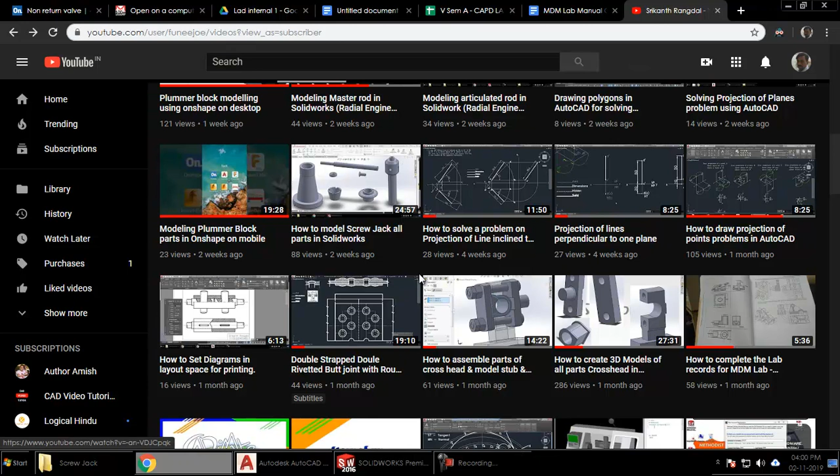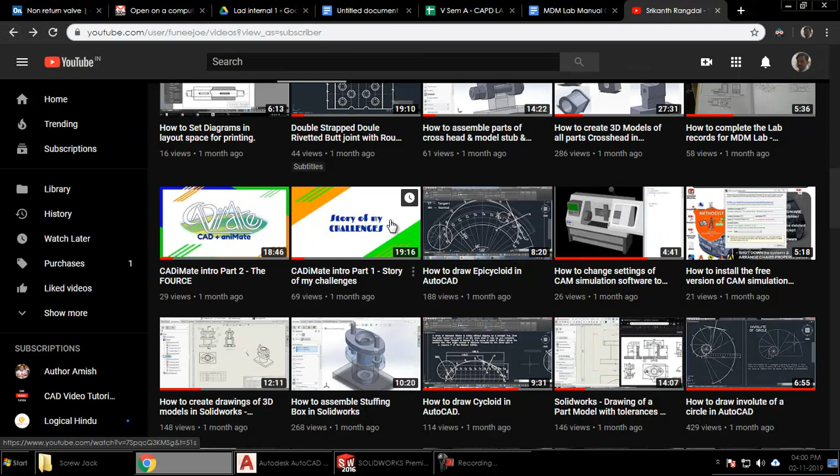In the previous video, we had seen how to model all the parts of the screw jack. This is the video here, you can see this. And I had forgotten how to assemble them. So in this video, we'll be assembling all those parts that we had created in our previous video.

So in order to assemble them, you'll have to go for a new file, click on assembly, click open, and press escape. First, let us save it. Just save it to the same place. So screw jack assembly, I'll just name it assembly, and then I'll have to insert the components one by one. So while inserting, you just have to click on browse, and you have to browse to each and every part that you want to insert.

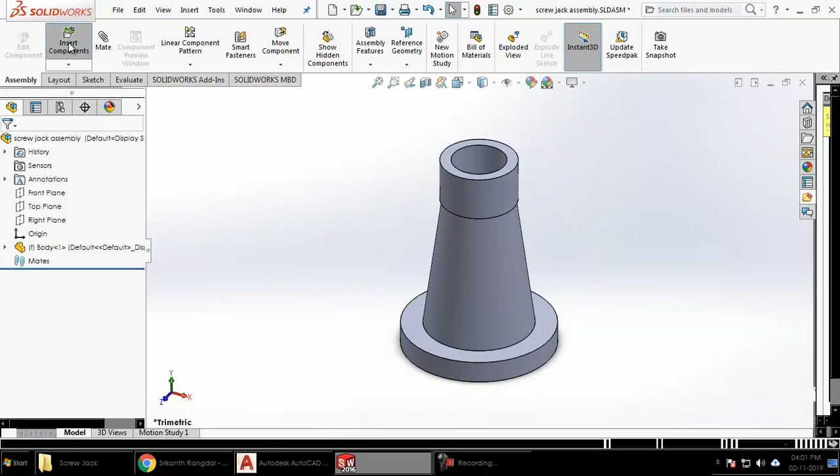So first, let me go for body. Body part will be placed, and you can see the first part that I insert will get fixed automatically. Go for insert again, browse, and we can go for all of the parts one by one, or you can just press Ctrl and select all these parts at once. So click open, and all these parts you'll be able to insert them one by one.

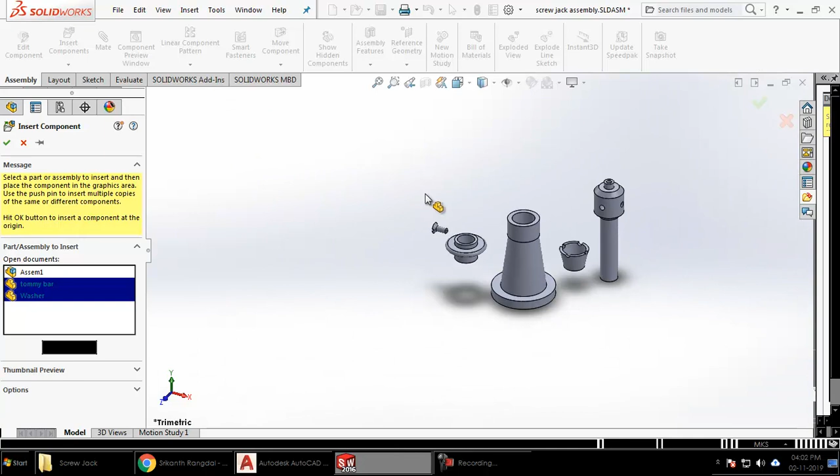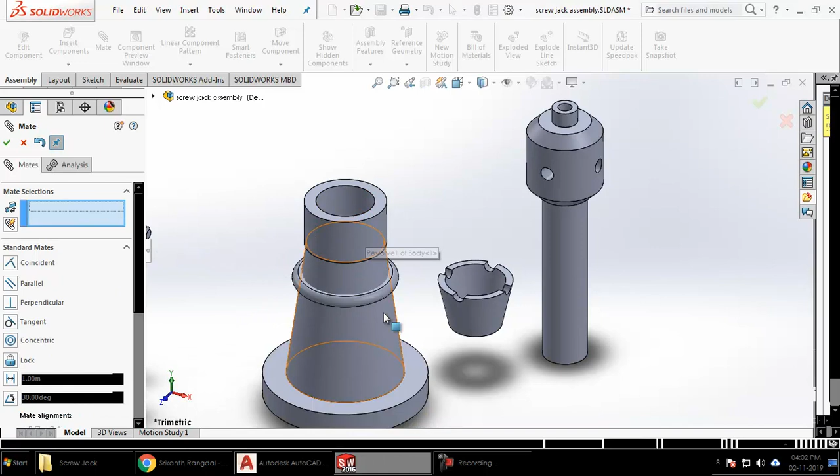Fine. So having inserted all those parts together, the body is already fixed, so you can directly start mating these parts. The first part that you have to mate is this one with this. So it will become a revolute joint. You can just raise and make it like this. Next, what we want to do is we want this face to be in contact with this one. So that has got mated.

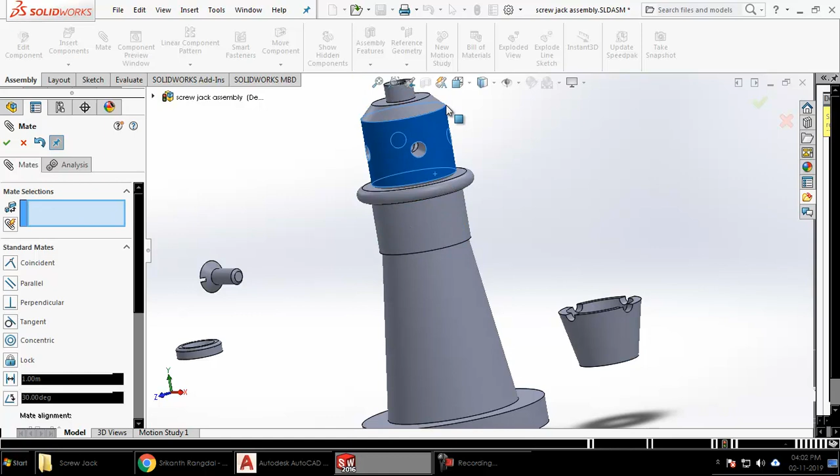Click OK. Next, this cylindrical surface with this cylindrical surface, we can raise and make it fall. So this needs to keep rotating and moving down and up the same way. Next, we will have to take up this one with this one. So once again, it has become concentric. The axes have got coincided. You'll have to raise this part up, just like this.

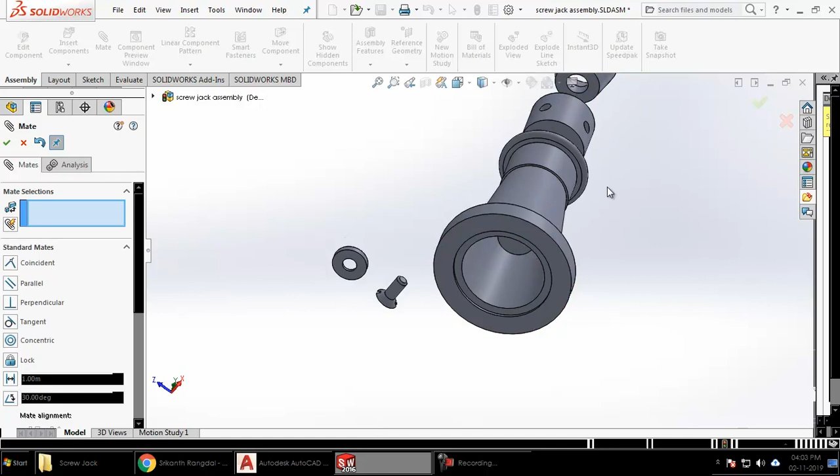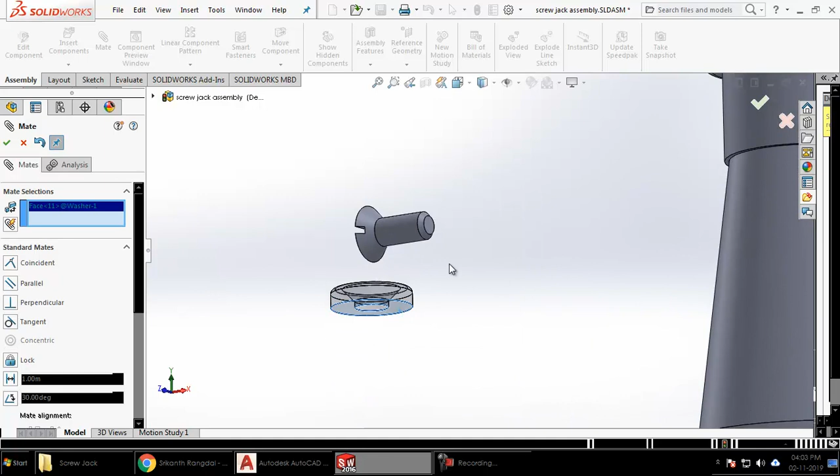Next, what I'll do is I'll just take this face, and make it coincide with this face. Click OK. Next, I'll have to take this washer. So let me take this plane and make it coincide with this plane here. Fine. So that will bring them both to the same level, and it will be moving in the same plane.

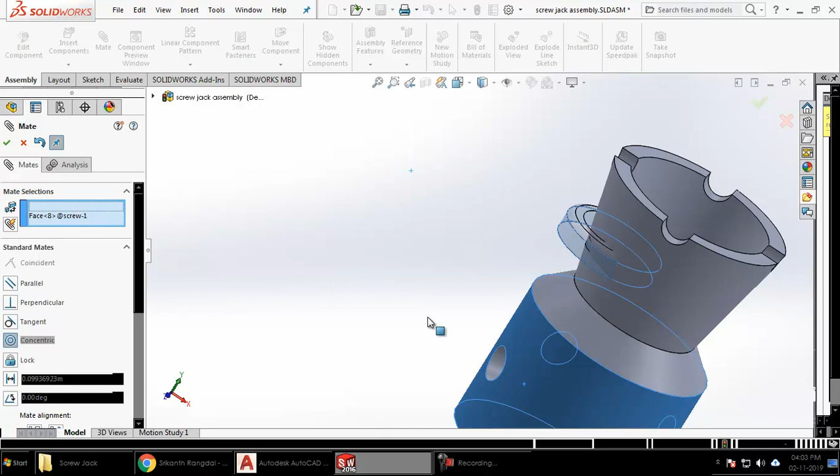Next, I'll have to coincide their axis. So I can just select this cylindrical surface, and along with that, any cylindrical surface you can just click on. So that will make sure the axes of the two cylindrical surfaces selected will coincide. Finally, I'll have to assemble this. So axis of this cylindrical surface with the axis of this cylindrical surface. It has gone inside. Click OK.

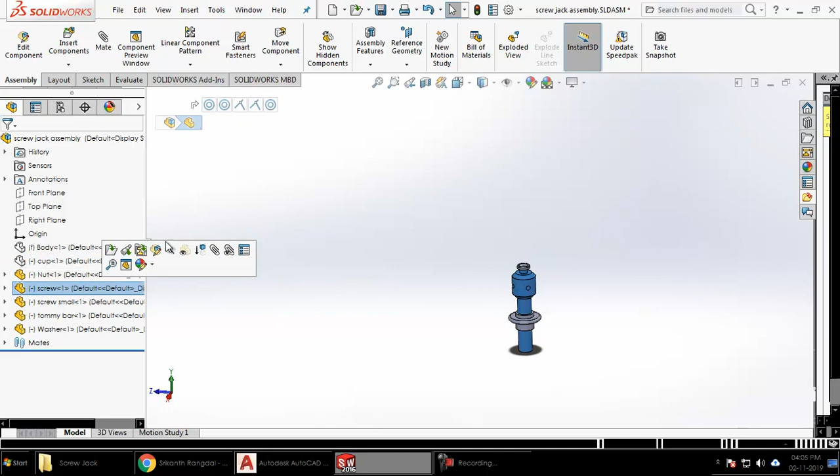Fine. Bringing it up is going to be difficult. So what you'll have to do is you'll have to hide some of the parts. Body, I can hide it. In order to hide, you just have to click on this part in the navigation and click on this eye. It will hide. So go on hiding whatever parts you don't want. And yes, at some point you'll be able to see this part like this. Then I can just unhide it by clicking it once again.

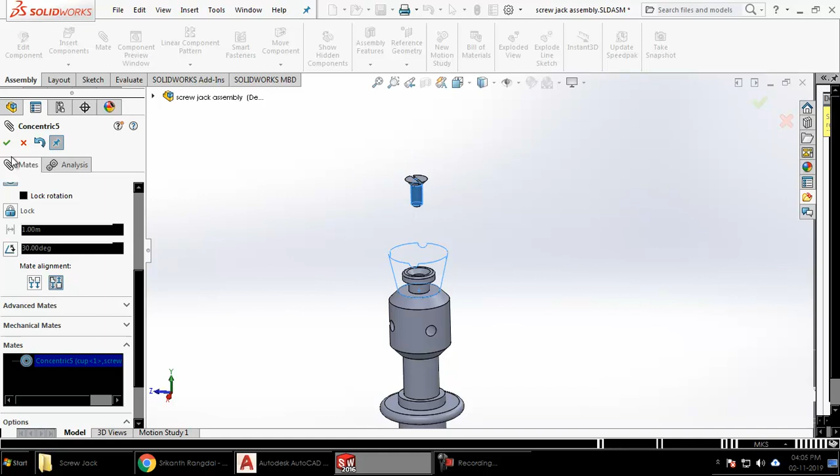So after doing this, the last mate was created a little bit wrongly, so I'll just have to go to editing that mate. And here we want this in opposite direction, so you just have to click on this point. Okay, this will reverse the screw in proper direction, proper orientation. And now I'll have to mate the two surfaces together.

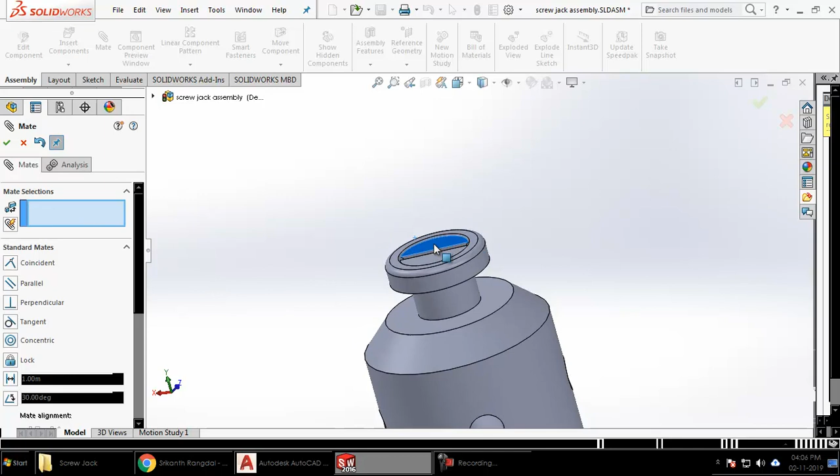So go to mate, and the surface has got to come in contact with this surface. So you can see it has chosen the coincident mate automatically. That means it will mate coincidentally. Fine. And yes, that's it. That's all the mates we have applied, and you can unhide all the geometry that was hidden previously. Yes, and you have this ready. You can see that it is rotating, at the same time it's moving up and down.

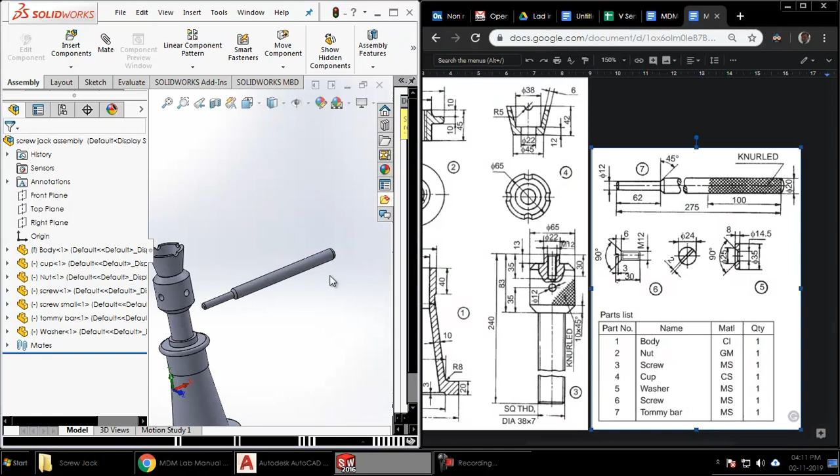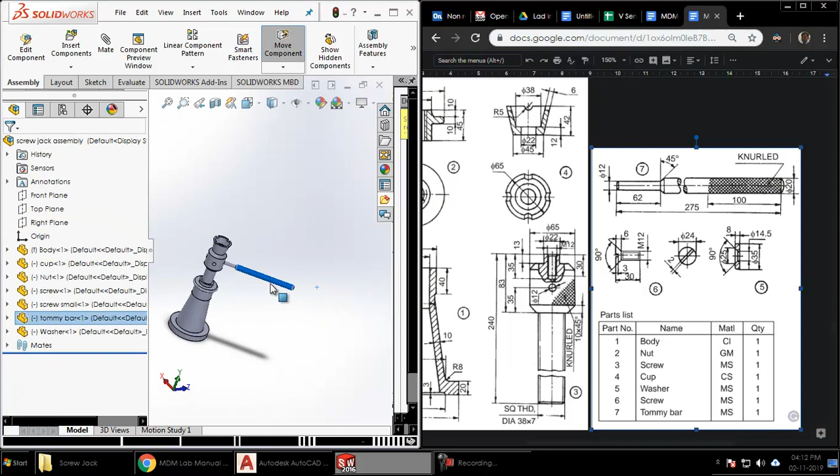Finally, the tommy bar, you'll have to again mate it, this cylindrical surface with this one. So I think that's it. That's all you need to do with the assembly. You can see it is behaving as we expect it to. Of course, some limits and other stuff we need to provide along with the threading and some relations in order to make it operational perfectly. But this is going to be enough from this particular lab point of view. So hope you all practice and come to the lab, and execute the same properly over here.